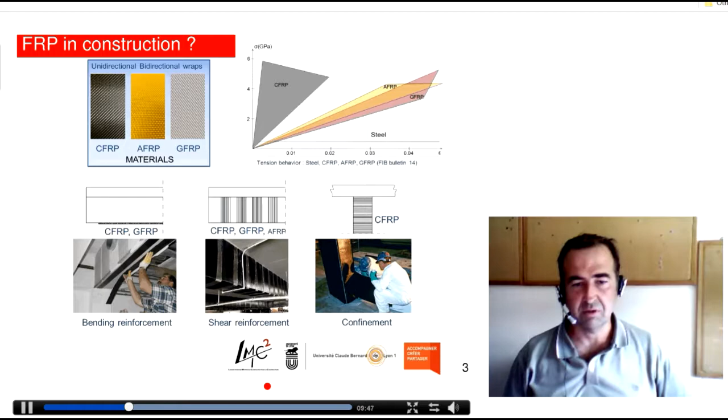Flax fibers are natural fibers and can be compared to some industrial ones that we all know, such as carbon, aramid, or glass fibers. The question we had a few years ago was to think about using these natural fibers instead of these well-known industrial fibers to strengthen structures for flexure, shear, or confinement. This was the aim of our research in this project.

So flax fibers, if we compare them to usual fibers, may be mainly compared to glass. If we look at the specific modulus, they are very light, a little less high in terms of the Young's modulus, but the specific strength is very high.

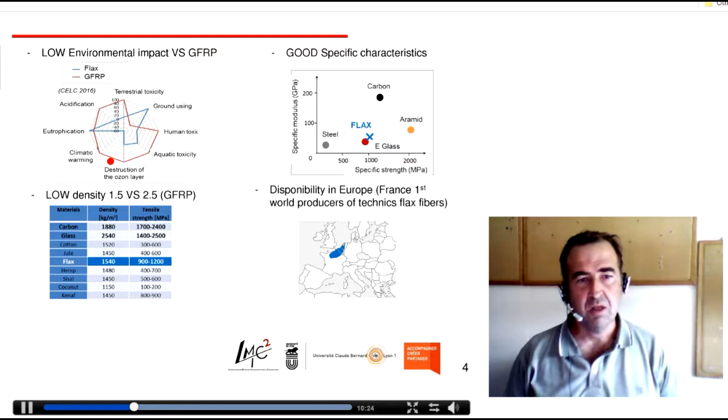Then, of course, they are less toxic and more friendly for ecology, since they are natural and produced very easily.

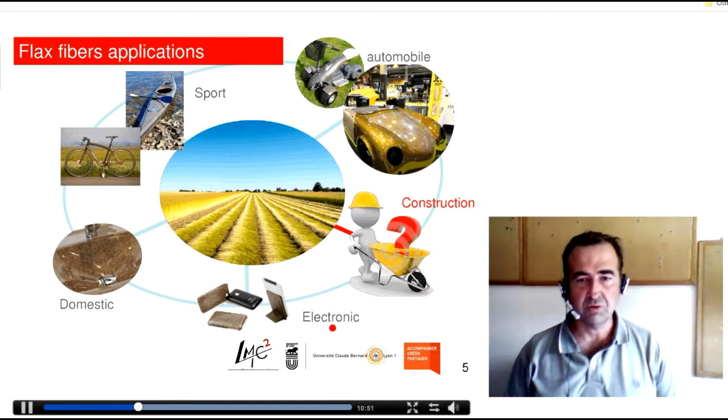Nowadays, these kinds of fibers are already used. There are some companies in France promoting this use in automobile, electronic devices, some domestic use also, and sports areas. Our aim was to think about using them in the field of construction.

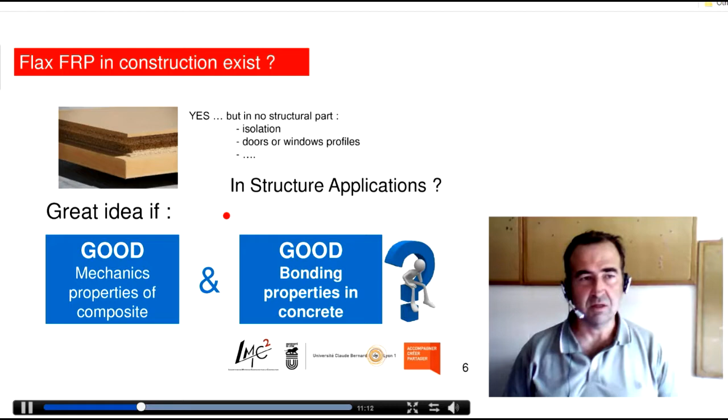Flax fibers are also used already for insulation in this field, for doors or window profiles—they are very light, used with thermoplastic matrix. But for structural applications, there is not so much use in this field.

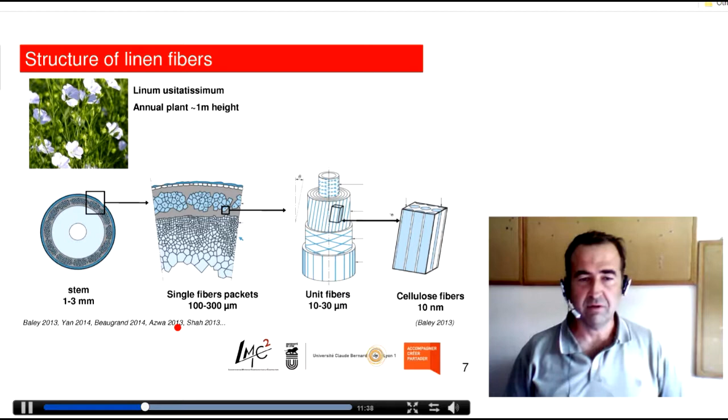These natural fibers are very specific and already well known, for example by Baley in the literature review. They may be compared with wood fibers—they are cellulose fibers, and this will modify their mechanical properties, which we will see later in the webinar.

For example, if we compare to glass fibers, stress-strain curves are not linear. They are mainly bilinear: a first stage where the fibers rearrange themselves with a higher Young's modulus, and then a second stage where the Young's modulus is more or less constant.

So for the next part, all the properties are given in this second stage, where the mechanical properties are nearby and the same. This has been well identified in the literature, where several authors have clearly shown that the mechanical properties of those fibers can be compared and give this kind of typical curve.

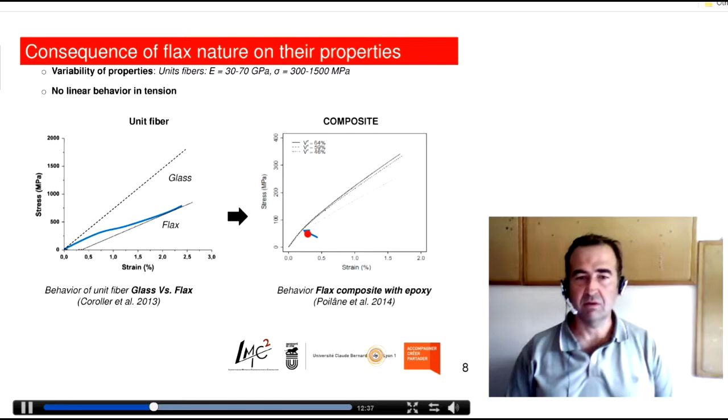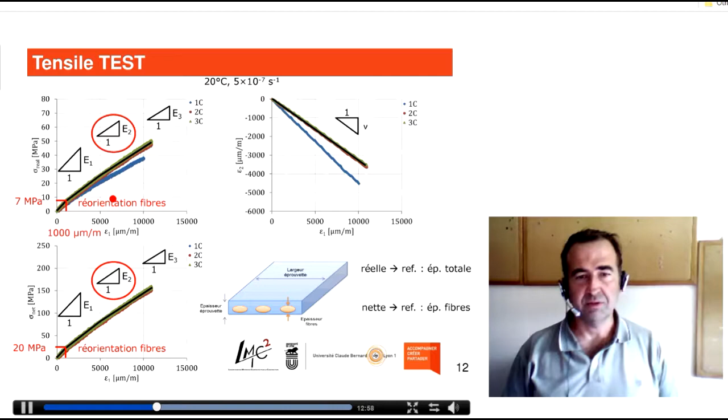Then, what we've seen about the first part of the test we developed in the lab was to confirm this two-stage behavior for the flax fibers, and we also obtained several interesting results that I will develop.

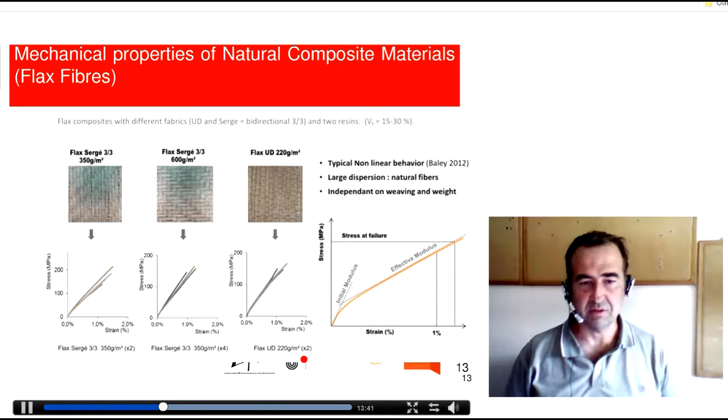These are some photos of how the fibers look, and what we get at the end is a Young's modulus of about 11 gigapascals and a tensile strength of about 170 megapascals.

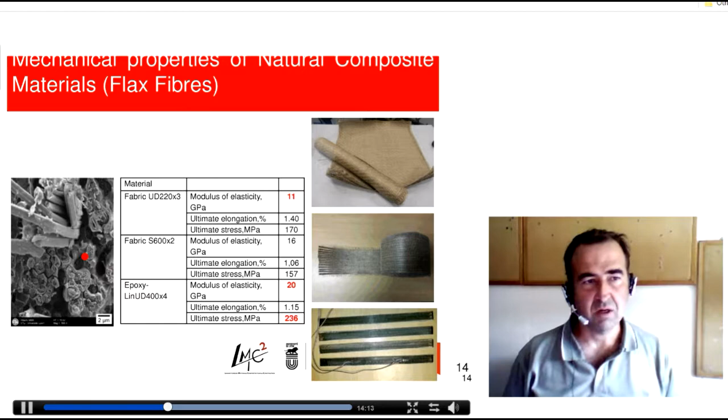You can observe here that some debonding may occur with these fibers, and this obliges us to use two epoxy systems: one with a high viscosity and one with a low viscosity, allowing it to bond onto concrete.

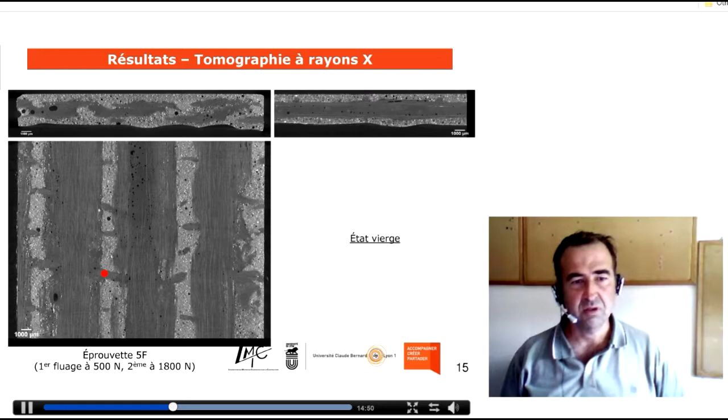If we use some specific methods to look at what the composite looks like, what you can observe is that due to the hand layup method, there are a lot of voids in the composite. But you can also observe that many of the fibers are impregnated by the resin thanks to this system of two polymers: the first one which impregnates the fibers, and the second one which allows bonding the fibers onto the concrete.

So here you have several epoxy systems that we have tested in order to get different layers and optimize the best one.

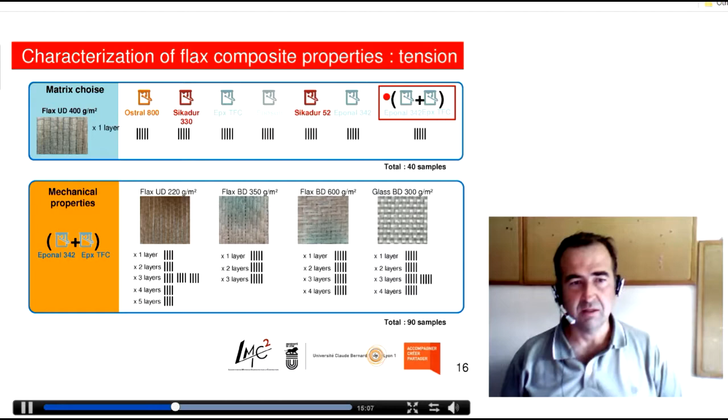This was at the end the best system, from which we get the highest mechanical properties—mainly the different tensile strengths. One first objective was to compare the different strengths we may have depending on several layers.

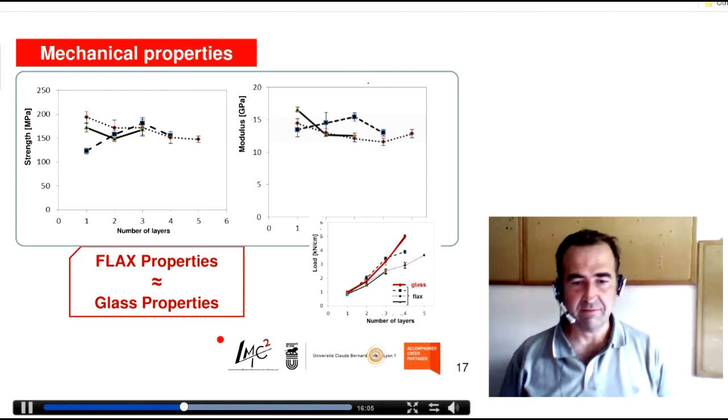What we observed is that we had tensile strength near 150 megapascals and the Young's modulus about 15 gigapascals. So in the first conclusion, we can observe that flax fibers may be more or less comparable to glass fiber properties. Here we have a very light glass fiber, about 300 grams per square meter, compared to the flax fiber composite in our study.

The next stage was to evaluate how these flax fibers can be bonded onto concrete using this specific matrix polymer used in our research. So we used a typical double lap shear test, and we obtain shear as a function of bond slip.

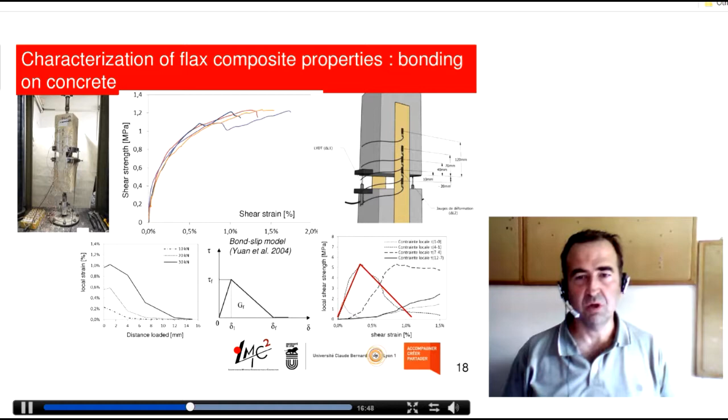We can observe the local strain distribution, and then compare this to usual local bond slip models obtained in literature. What we can say is that the behavior is more or less very similar to the one we obtain with glass or carbon fibers, just the mechanical properties may change.

For example, we compare the ultimate load as a function of the experiments we have, and compare this to the different models proposed in the literature. Of course we have to fit this since mechanical properties are a little different, but if we fit this, we are able to get more or less a very nice calculation of the ultimate load.

These results have already been published by Alonnet, one of my PhD students, in Composites Part B, and this is the title of the paper. You may find all the details about these experiments there.

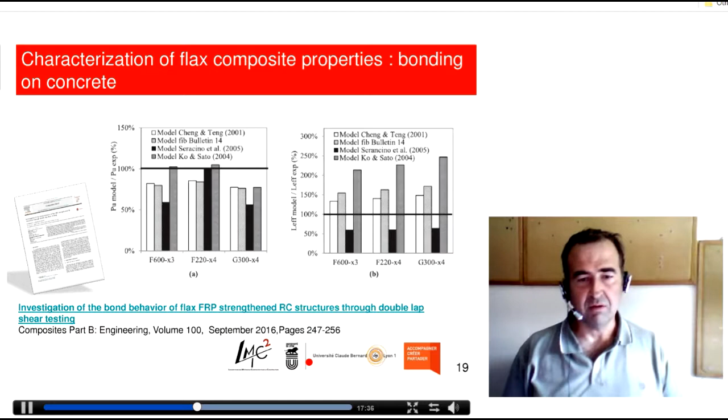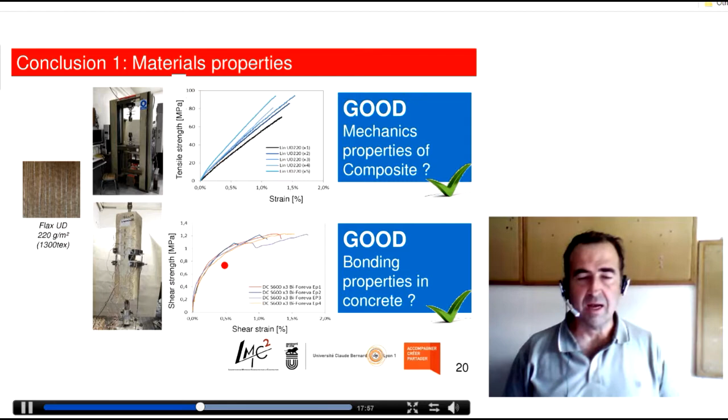So to conclude this first introduction, what we can say is that the properties of flax fibers, if well developed, the composites may be very nice and comparable to those we have with glass. Bond is not a real problem on concrete, and we can develop a higher level of strength onto the concrete and a low level of sliding, so the behavior may be very interesting.

So the next stage may be to do tests at the scale level of the structure. In a second PhD, what we've done is a first study about shear strengthening. We used two specific systems, a rectangular section and a T section, in order to evaluate the variability.

On this, we have tested several different specimens, different spacing of the flax fibers, different widths, and also a continuous strengthening, and we compare this to the carbon method.

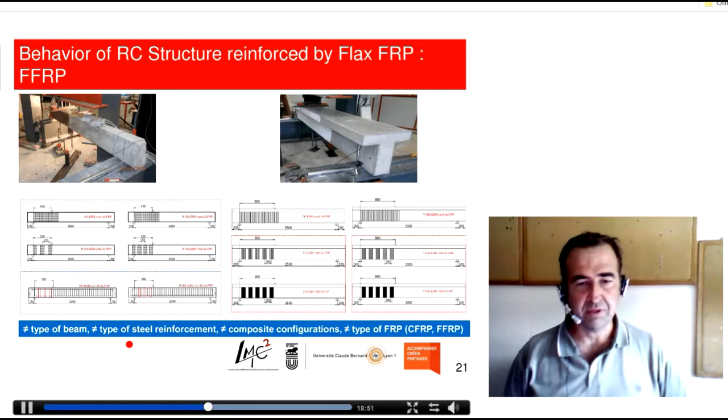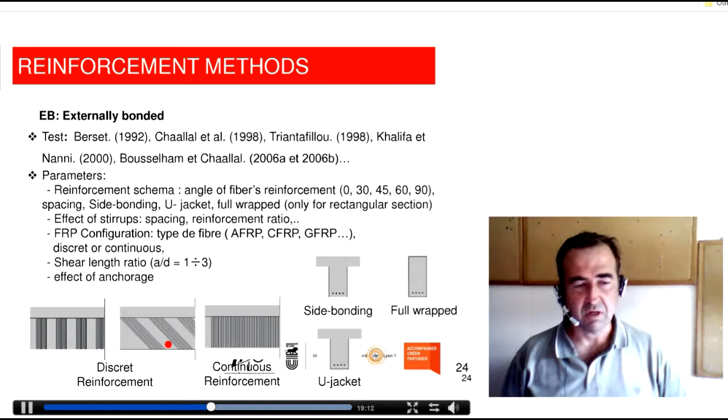You all know there are different strengthening systems, and in our study we mainly focus on this continuous strengthening. We didn't focus on different inclinations or NSM techniques.

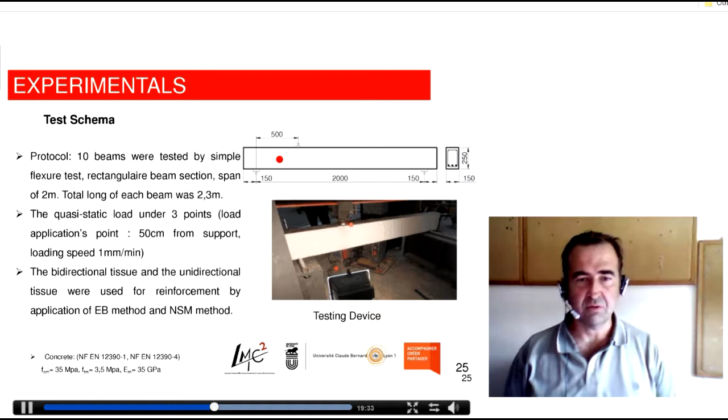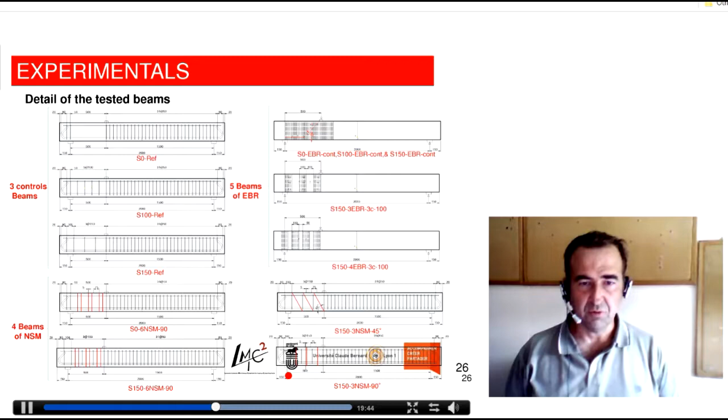So more details about the specimens we tested. Ten beams, two meter span, have been tested, loaded in this way such that we have a high level of shear loading in this area and less in this one, so that the shear failure occurs here. You have all the details about the strengthening in this slide. Of course, more detail can be obtained if you just send me an email.

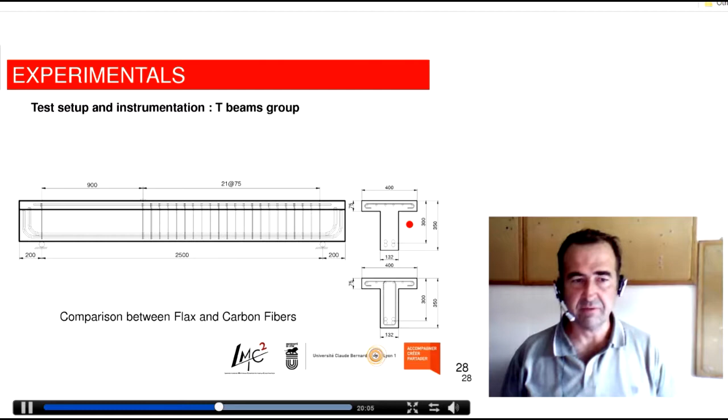We also evaluated the T section. For this one, it was a 2.5 meter span, and the idea was to see the problem of debonding and to get a higher depth beam in this area.

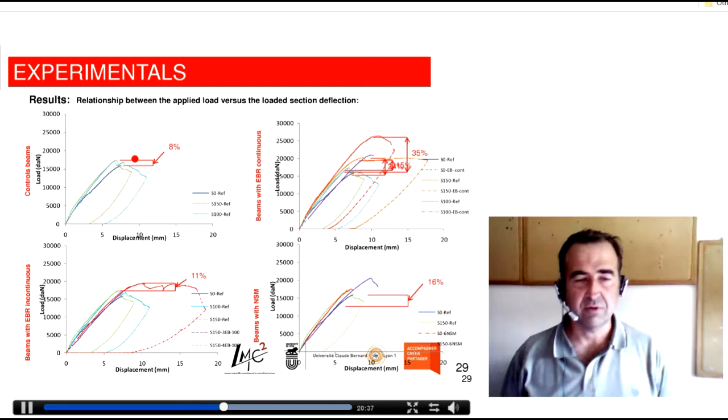As a result, if we compare the reference one and the strengthened one, we can observe that with continuous strengthening, the increase in strength is more or less very interesting, about 30% increase. But if this continuous strengthening is used with a very light, only one layer, the amount of increase in ratio is very low.

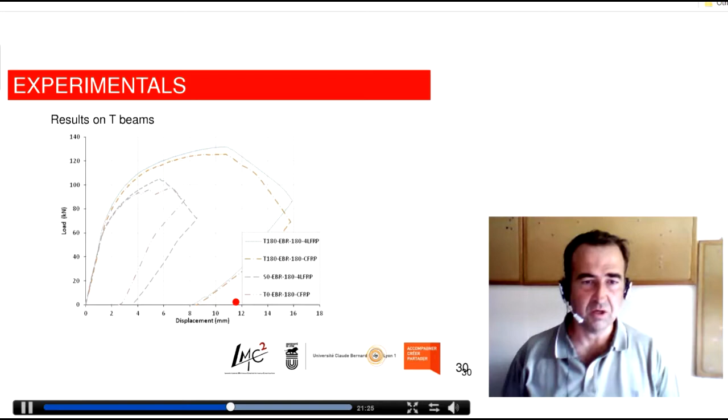For the T section, what is very interesting is to see this is the unstrengthened specimen with a brittle behavior, and this is the strengthened one with an external bonding of 3 millimeter thickness of flax fibers and a width of 180 millimeters. What is interesting is that we obtain a very ductile behavior. Shear failure was not an issue anymore with this strengthening, and we increased about 40% of the ultimate load capacity of this beam.

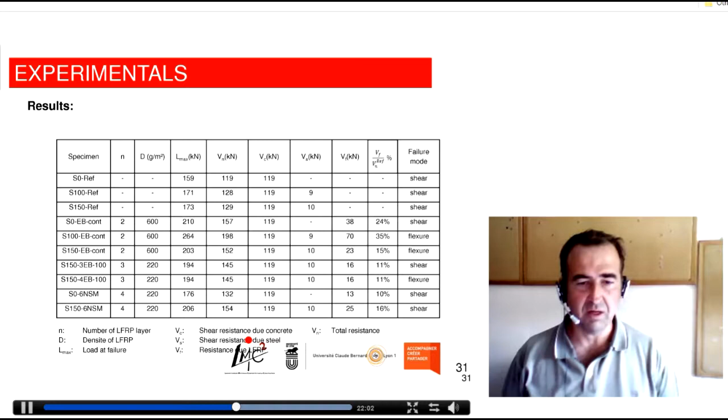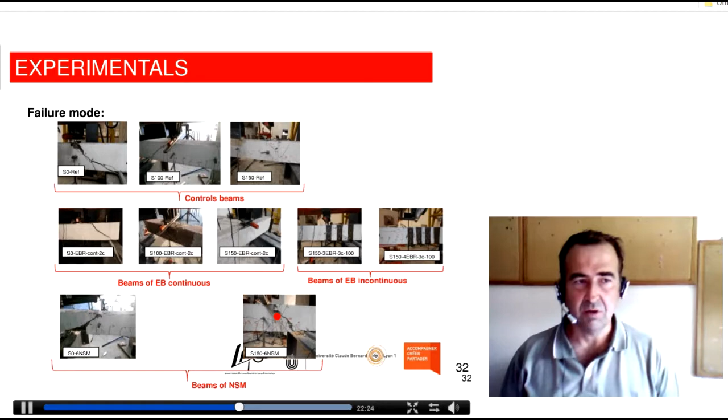And in some cases where the strengthening is very light, what we get is a very low level of load increase, less than 10%. Some photos about the shear failure: you can observe the specific shear cracking we have in different specimens. One thing that's very nice to see is that we didn't get flax debonding, but we've been able to get the failure in tension of the flax fibers.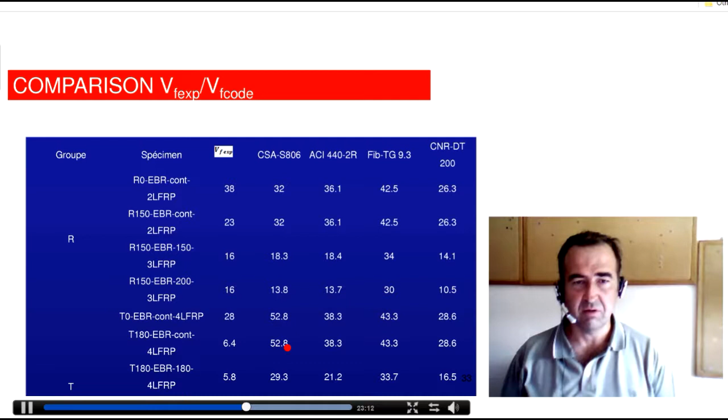We then compare these results with the different ones coming from literature, using CSA or ACI or FIB or CNR bulletin, and the failure we expect to get with the flax fibers using the mechanical properties. In any case, only with the FIB bulletin is the estimation very nice. With this calculation method, the load expected is higher than the one we get really in experiments. But in most cases, generally, the level of load is calculated as the one we have with carbon fibers. So in order to better understand how the strain is distributed in the flax fibers, we use a DIC method in the cracking area.

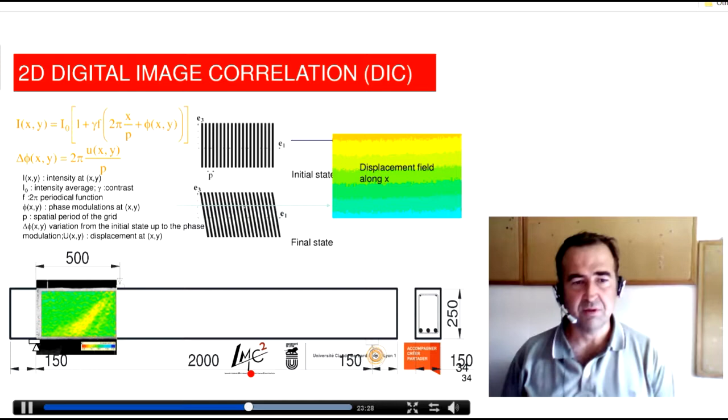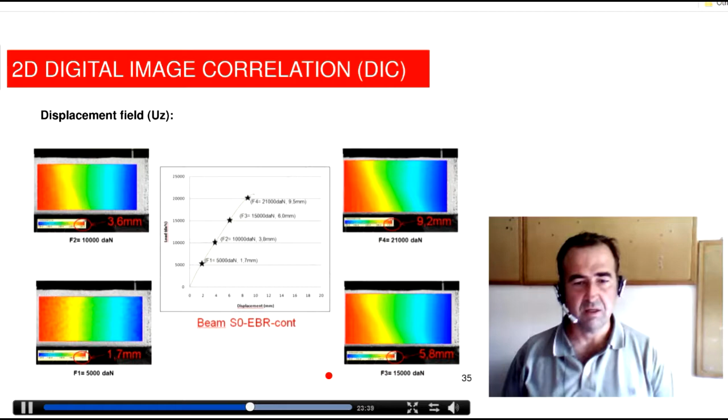In this way, we are able to get strain and stress curves for different levels of load, obtaining the different cracking pattern. We compare this also with strain gauges locally bonded onto the FRP system. What you observe is that cracking propagates very nicely under the flax fibers, and then at the end we obtain the failure of the strip in the area where the tensile properties are the highest.

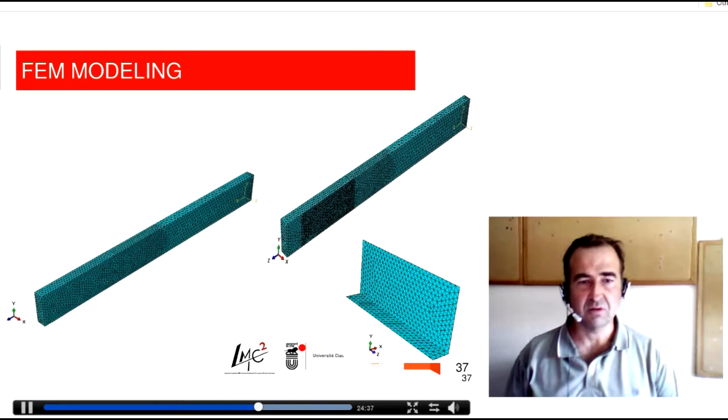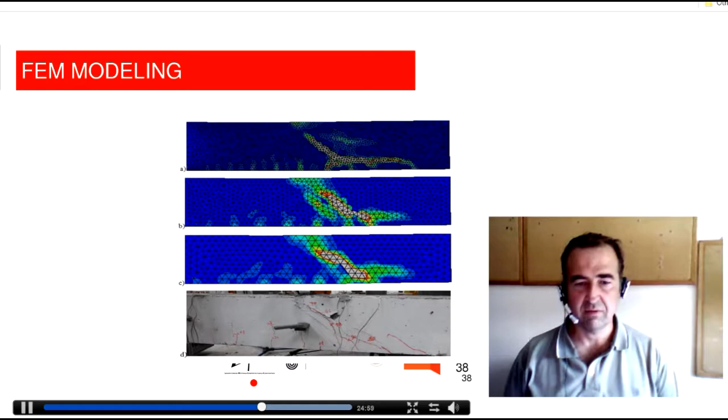To compare this, we developed some finite element modeling using plates for the composite area. The reinforced concrete beams were modeled using ANSYS software, with internal reinforcement and a smeared concrete crack approach. In this case, we were able to model the crack, which was comparable to the one obtained experimentally. You can also observe here the large strain we have with the experiment.

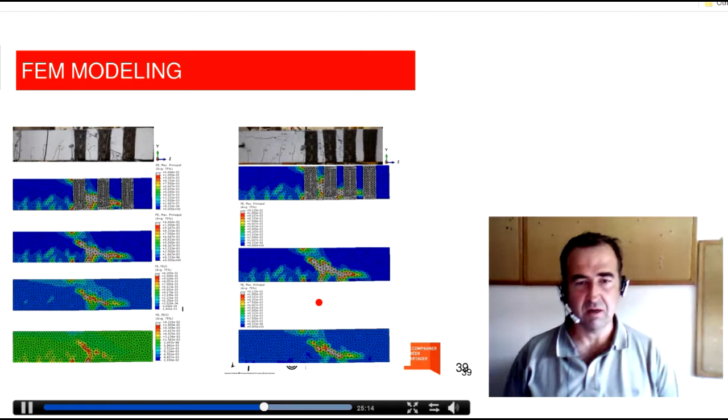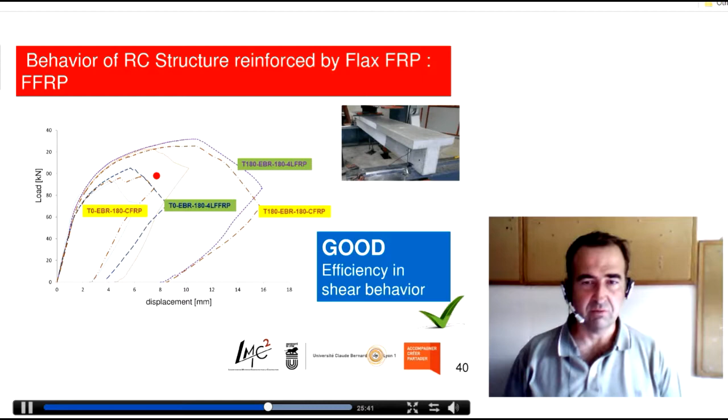So with the strips, again, you can see here the comparison between the experiment and the modeling, which allows us to get a high level of stress. So to conclude on this second stage of our research, for shear strengthening, the use of flax fibers is very efficient. You can have a very important increase of the loading capacity, and it can solve the problem of shear for some reinforced concrete beam strengthening.

Third stage of our research, done in collaboration with Enzo Martinelli at Salerno University, was to evaluate the efficiency of flax fibers for reinforced concrete walls for seismic retrofitting. The idea was to use such fibers so that we can replace carbon ones for walls loaded by compression and cyclic loading.

So 6 walls were tested with carbon fabrics externally bonded to the concrete. Anchors were placed in order to ensure the continuity of force between the wall and the basement. For the shear wall, a small wall was tested in order to be able to propagate shear failure instead of flexural failure. 6 walls were tested with different configurations of carbon fabric bonding onto the support.

For the flax fibers, we compared the use of 3 walls. Two had longitudinal reinforcement at the end of the wall, with two or three horizontal strips in order to avoid shear failure. The third one was just strengthened by a FFRP sheet on the entire support of the wall, and we additionally placed 2 strips at the end made of flax fibers in order to increase both the flexural capacity and the shear capacity. For the small wall, we only used one.

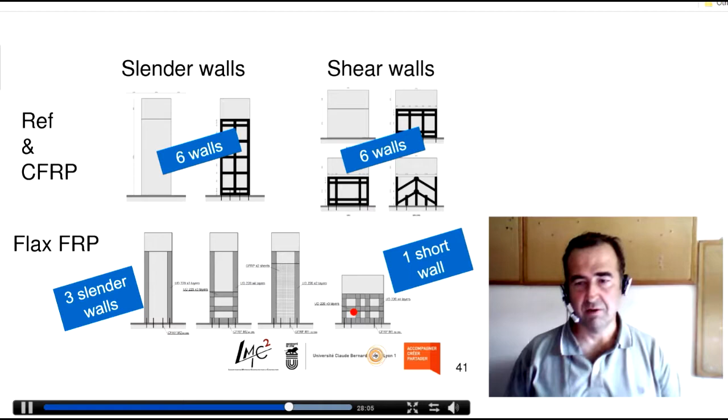As you can see, because the properties are lower than those of carbon fabrics, what we observe is that we have to put more flax fibers onto the support.

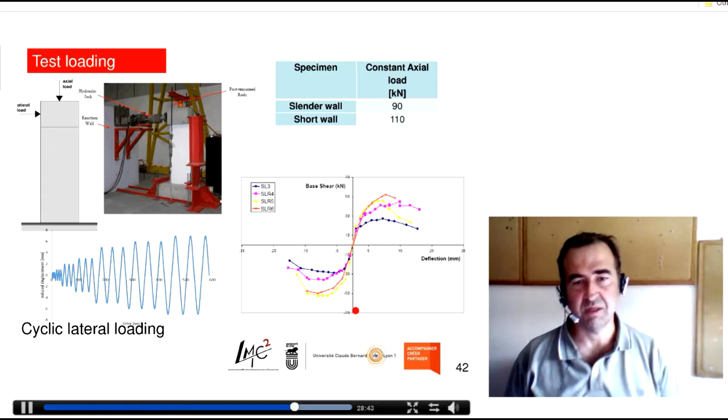Then, the testing device is already well known. The loading procedure is quite usual for this kind of test: we increase progressively the displacement. The load is displacement controlled with a speed of 100 millimeters per minute. Then a vertical load is applied via hydraulic jack to control the vertical one, and a horizontal load is applied cyclically. This is the result we typically get if we look only at the maximal load and displacement for each level of the hysteresis curve.

If we compare the results, this is the reference specimen - you can observe a very brittle failure, mainly due to longitudinal cracks in flexure appearing in the basement of the wall. And when the wall is strengthened with flax FRP...

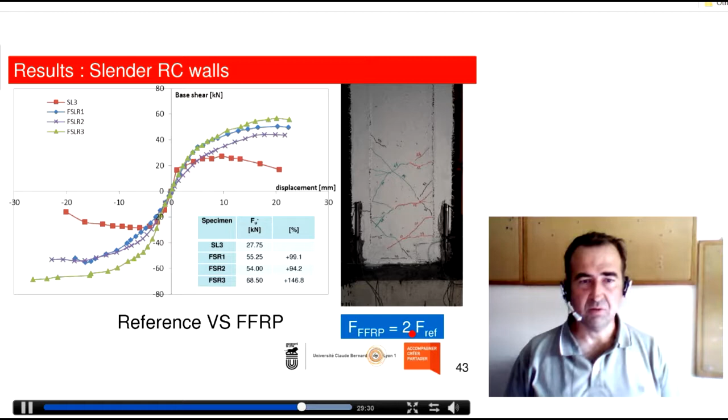You can observe a very important increase in the horizontal load capacity. This increase, compared with the flax fibers, is very nice, and we'll see that it's also interesting for dissipation capacity.

At the end, we obtain a capacity thanks to a horizontal load which is twice in comparison with the reference specimen. For the short walls, the increase is lower, but the load is very high. We obtain 35% increase in shear, but what we get in this wall is a premature failure at the basement with a sliding of the wall between the wall and the basement, so we didn't get the real full shear capacity of the wall.

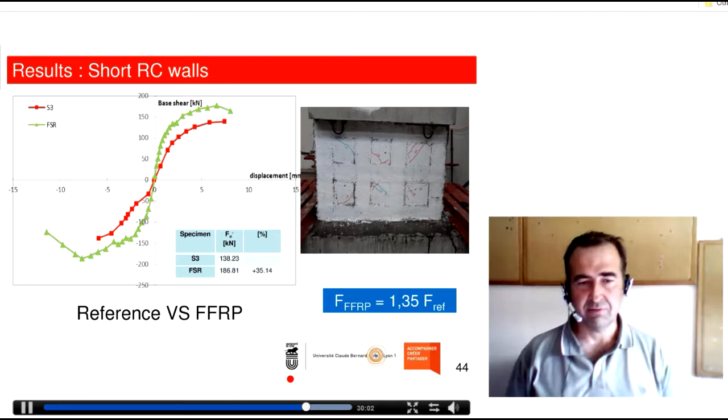To compare with carbon, as I mentioned, you can observe that the carbon wall was here, and the one in green was the one strengthened by flax fibers. What you can see is that it's very interesting since we have an important increase in load, but also in displacement capacity, in compression and in tension, because we have push and pull tests.

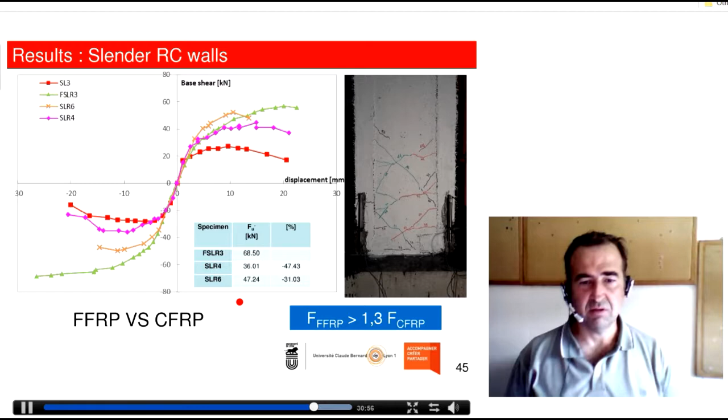So the test is very, very nice, and much nicer than the one obtained with carbon. In carbon test, we have some buckling of the carbon due to the important Young's modulus of the carbon. In this specimen, what we've seen is that the debonding did not occur, and we have very nice behavior until the failure. So this is the comparison for shear failure.

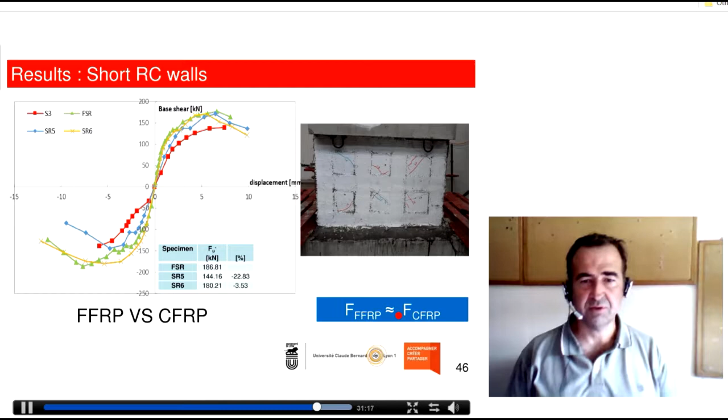What we can observe here is, again, the comparison is that it's very comparable to the one obtained with carbon fibers. So in conclusion, the flax fibers may be comparable more or less to the carbon one.

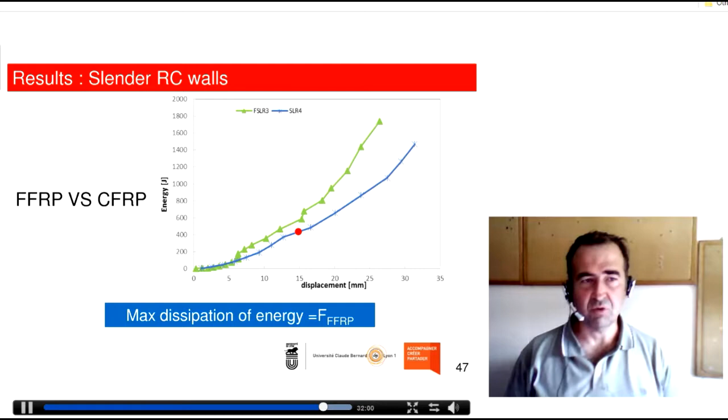It means that flax fibers are more suitable than carbon for seismic strengthening issues. In order to compare if this kind of flax fiber may modify the way that we calculate the wall, we use a usual calculation method developed in, for example, Eurocode 8 part 3.

What we have seen is that the contribution of flax fibers may be calculated more or less as for carbon ones, and that if you have the real mechanical properties of these fibers, you are able to calculate very precisely the experimental load capacity of this wall.

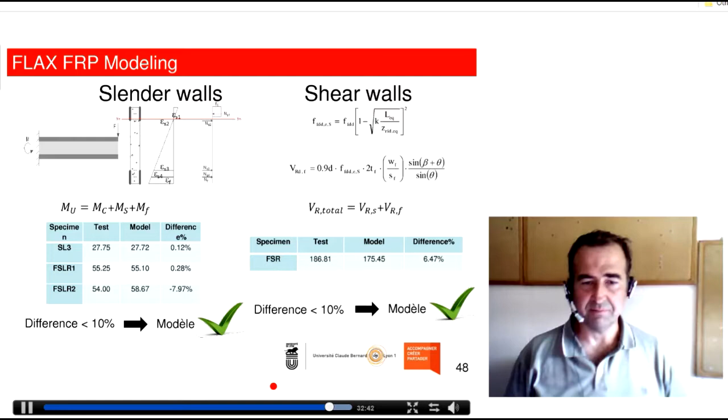So to conclude, flax fibers may be very interesting for shear strengthening of beams, and you can expect to have an increase of 10 to 35%, depending on the existing structures. Flax fibers don't change the mechanical behavior of such beams.

They can be calculated as usual, and so flax fibers may be more or less comparable to the one obtained by carbon - the mechanical properties just change. DIC method, as we've seen, is very interesting to investigate the strain localization and the strain values we can obtain on flax fibers.

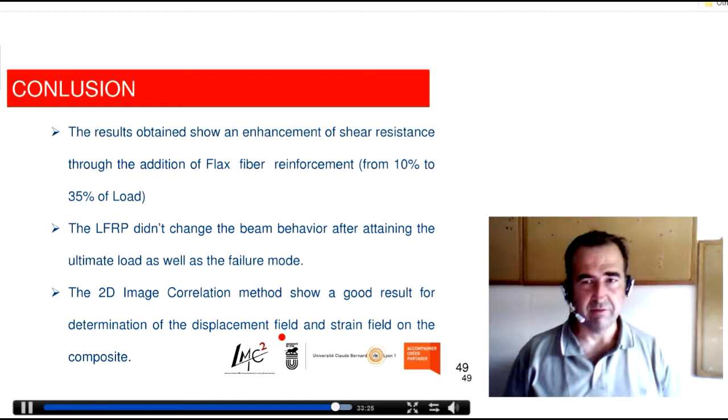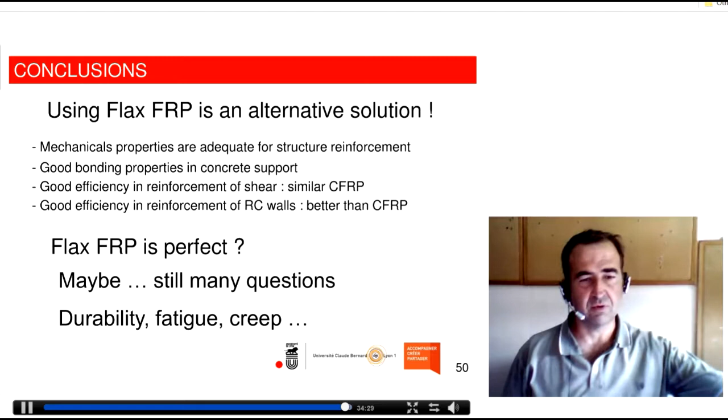It's some investigation we have to continue in the lab. Of course, those fibers are not perfect - there are still many questions about durability, fatigue, creep. We already have done some nice work on durability and creep, and they will be published soon. It seems that, of course, there is a decrease in mechanical properties, but then it's not really a problem for the use of such fibers.